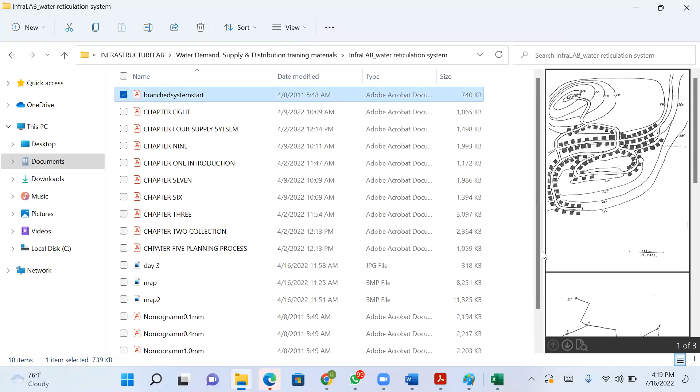Then we have what I call nomograms. These are charts for pipe sizing. I'll teach you how to do that. After you've gotten your discharge, the water demand, you need the size of pipe that will successfully conduct that volume of water. These are the 3 charts you use. There are 3 because they have different roughness. One is for concrete, one is for ductile iron, one is for PVC pipes. So depending on the material you're using for your water reticulation, you use the appropriate type of chart for that.

Then here, I'm going to make a presentation, and this is where we're going to start. In the course of the presentation, I'll show you the drinking water quality requirements based on German standard, European standard, and WHO standard. So these materials are all here for you, and videos will follow shortly. Now, I'm going to give a presentation to start with, and that is this slide, presentation and overview of centralized water supply system. If you don't mind, I would like you to open it.

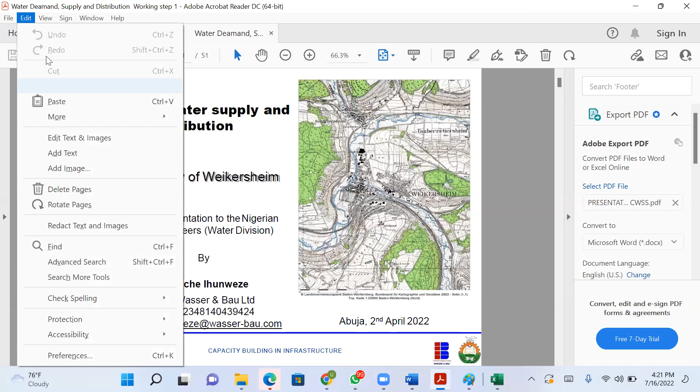I love to start with this slide because this is a presentation I made many years ago when I came back from Germany, and I was asked to make a presentation to the Nigerian Society of Engineers (Water Division). So I made that presentation, and each time I'm doing training, I like to fall back on that presentation. The reason being that the presentation summarized everything you need to know in one PowerPoint in order to design a centralized water supply system.

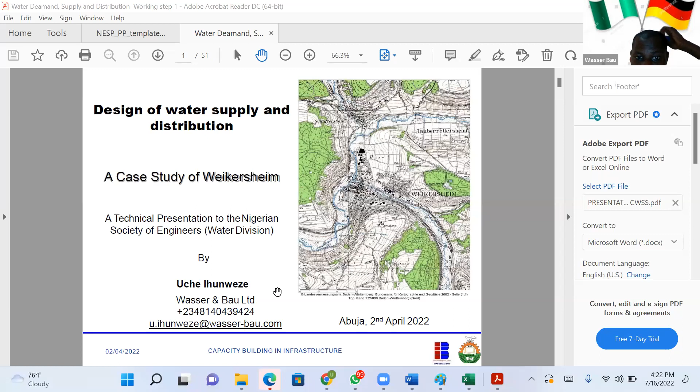Okay, today is the starting day. Some people will call in and... okay, I'm sorry about that. I think one or two of us are having issues logging in. So can we open this slide? Design of water supply for a case study. Okay. Just hold on, gentlemen. Some of us are having issues joining this meeting and... okay, meeting info. Copy the link. Just hold on, please. Can somebody see if I'm sharing the slide? I've already shared the slide. The slide is already on Google.

Okay, so let me start with a summary of how you go about water reticulation, either from the angle of a consultant or from the angle of a contractor. So this is what you need. We'll start from the angle of a consultant, because you are the infrastructure expert and you've been consulted and requested to design a water reticulation system.

So the first thing is there are 6 components, or 5 technically. You do the introduction, you do the description of calculation basis, you do the presentation of estimated figures, you design your distribution network, you analyze the distribution network, and then you conclude on your design.

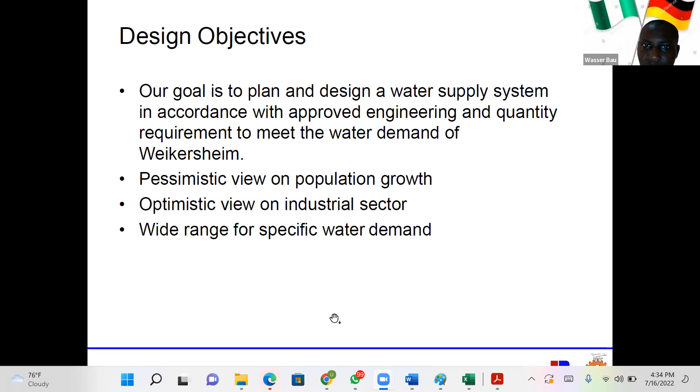So what next do you do? You now study the area. You describe the area. How is the area? What are the contributing streams in the area? How is the geotechnique of the area? How is the groundwater flow, if you have access to this information?

And are there danger spots? Are there landfills? Are there mining areas that you should avoid? You just give a total description of the place you are designing for.

The next thing is you give a sectoral study, okay? Like if I'm designing for a place like Abuja, I'll say that Wuse area is a commercial area, Central area is a commercial area, okay? I'll say that Lugbe is a residential area. I'll say that Pape is a mining area. I'll just give a total description so that your client or whoever is reading your report will be on the same page with you in terms of understanding the dynamics or the unique characteristics of the area you are designing.

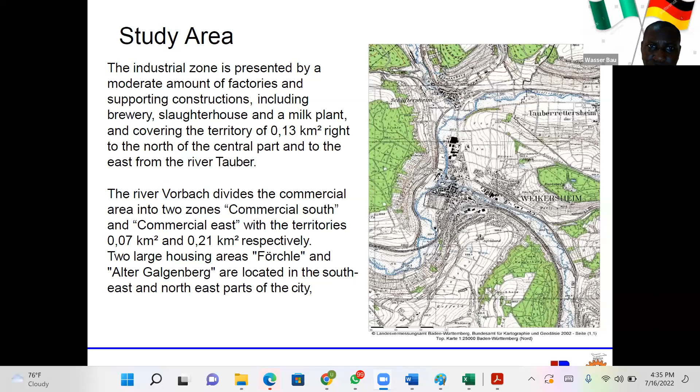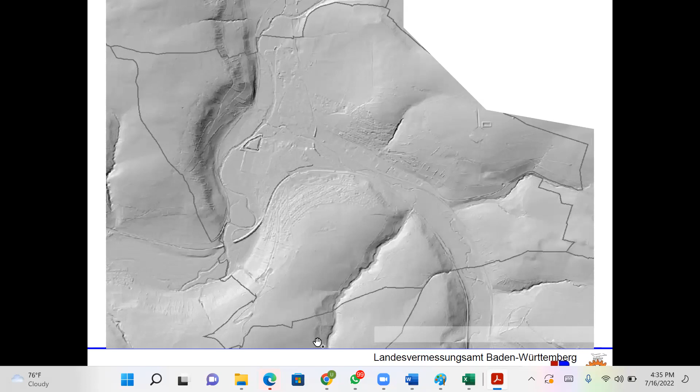After that, you include some pictures of the place, get some maps from Google Maps, a GIS person, surveyor, architect's plan, just get some information that will enable you to have a background and know how to do your distribution and your network. Okay, you can also show how the area is undulating, in terms of how the landscape is. It also helps make people understand how the area is.

The next thing you need to do is you might have to take sections. You have to cut sections and show why you need to provide 2 water systems. Now, looking at this picture, you could see that it is not easy to have just 1 water system for this area. It's almost impossible, because I'm wondering how you can lay your pipe along this valley. So if this is given to you to design, you'd definitely tell your client that you're going to do decentralized water supply systems. That means it will be phase 1, phase 2, or section 1, section 2, right?

Yeah, somebody brought a design to me some time ago for a medical school in Ogun State, and they were planning to design a centralized water supply system for a 200-hectare land. And this land is almost flat, so there's not much head where you can locate your overhead tank. When I did the estimation, I found out that if you are to deliver water by gravity, the pressure from point A to the last point will almost be 0. So I told them that a centralized water supply system is not feasible, and that they need to do a decentralized system.

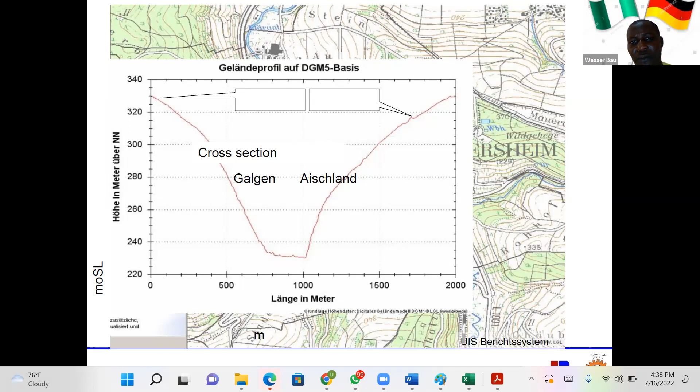So if you look at the whole system, it is one water source, but a decentralized system. Because a centralized system will mean the water will come from Lower Usuma Dam and then distribute to all these places, but it will not work. Because in some areas, you need to provide booster stations. In some areas, the pressure is going to sub-zero. Therefore, you need a pump to pump it further, right?

So you take sections. The next thing you do, just like what I just explained, is what we call zoning, pressure zoning. You can call it zoning or pressure zones. Why do we need pressure zones? I will tell you why.

The standard in water design says that the pressure in your system must not be more than 8 bars. If you look at it in terms of elevation, what is 8 bars? 8 bars simply means an 80-meter height is equivalent to 8 bars.

So if I'm doing a design where the difference between the water source and the consumer is more than 8 bars, it means you need to break it into zones. When I say breaking into zones, it means you need to define phase 1, phase 2, and phase 3. You need to break them into zones.

So for this design we did, the difference between the highest point and the lowest point is more than 80 meters. That means what we need to do is break them into zones.

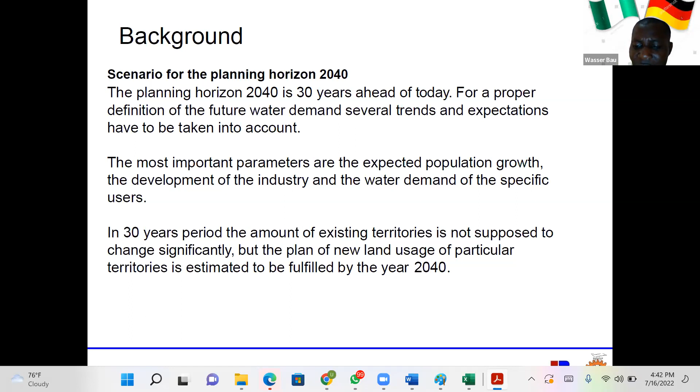You ask yourself, how long do I want the design to last? 30 years, 40 years, 50 years. When you determine that, you now do your expected growth, your expected development to meet the demand of 30 years. This entails projecting your population—what will the population be in 30 years' time? Let's assume the population for the city is 10,000 people.

Now you ask yourself, in the next 30 years, based on a certain population growth percentage—Nigeria is growing at 4%—what would the population be in 30 years' time? That is the value you now use for your design. I hope we get that very well. Then every other parameter we use must be tied to that 30 years.

So let's assume they are going to build a university here in 30 years' time. It means you will do your design with the anticipation that there's already a university in that area.

The next thing you do is sample your water source. There are about 4 to 5 water sources. We have groundwater—your source of water can be groundwater. It can be spring water. It can be surface water. It can be water from a long-distance water supply—in other words, from another treating body, like Lower Usuma Dam, where the water has been treated and is now coming to Kuje or going wherever.

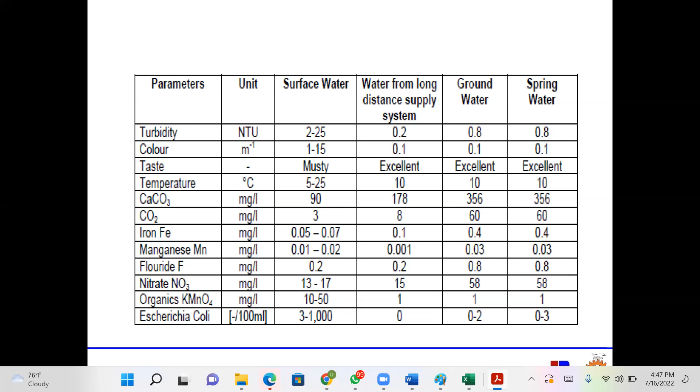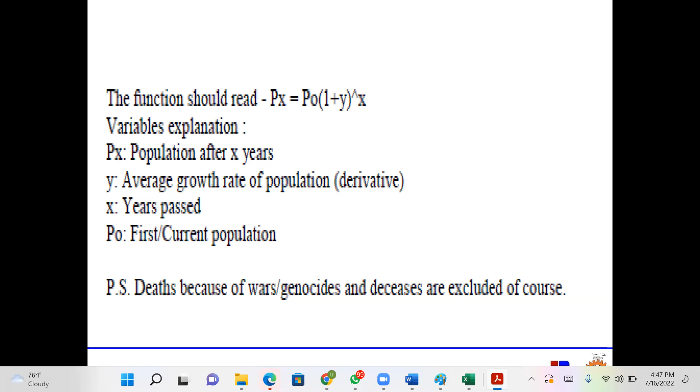So let me recap what we've said again. We did the background, we sourced the water quality and identified them. We did the population projection and sectoral representation of the population into clusters. We did the water test analysis. Then we now do the network distribution—if you look at the slide, that is the progression.

When you see diagrams like this, you discover that what have been designed here are the mains for every pipe distribution network. We have the main pipes, the secondary pipes, and the tertiary pipes. The main pipes are the major pipes, the ones that go on the streets. You can also call it the main pipe or the primary pipe—those are the big pipes.

In Abuja, the main pipe for the Abuja water scheme is about 1,500 millimeters. From 1,500 millimeters, some areas moved to 1,200. It started from Lower Usuma Dam with 1,500, that is 1.5 meters diameter. As it gets to somewhere in Maitama, Mogadishu Barracks, it came down to 1.2. Then from 1.2, it came down to around 600, from 600 to 300, and from 300 to 100. Why are they going down? Because as the water is moving, the demand becomes more, depending on where you're coming from.

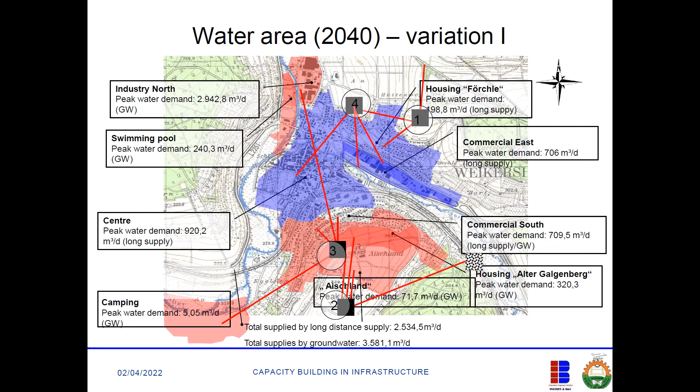After detailing the subgroups or sub-areas based on their unique composition, you now list their elevation, their population groups, and their number of inhabitants.

Then you do two scenarios: the current scenario, and in 30 years' time, the future scenario. In 30 years' time, this one will have reduced by 8%, while this one will have increased by 6%. Housing area will have increased by 6%, and the camping sites will have increased by 2%.

So you do this, and then you get the final figure. If you look at this figure, you see that the numbers here are bigger and more. That is the figure you use to do your pipe sizing.

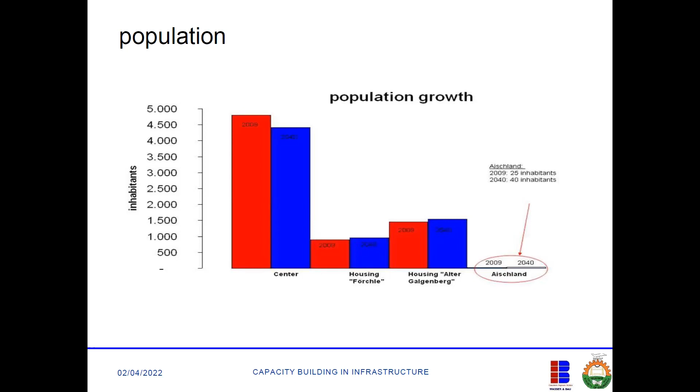All these are not that very important. They are just part of what a consultant will do. You plot a graph to impress your client, showing them the current demand for this area and what the future demand will be. You can see that some areas are going up, some are coming down.

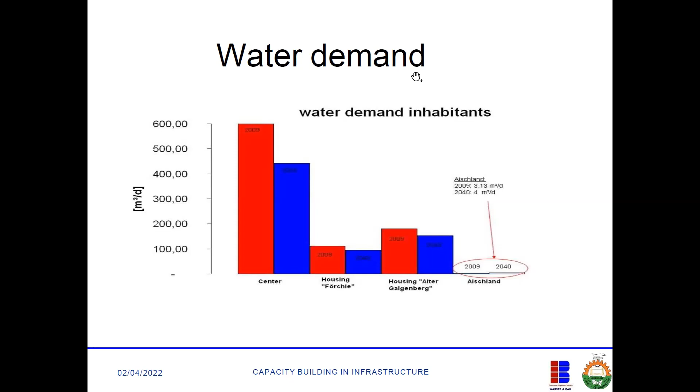Right, okay, so a recap again. What are the basic steps in water demand, water supply, and design distribution?

The first thing we said is that you need a map. It could be a layout, it could be a topo map, but it is important that it is a topo map. I didn't just say map, I said map and topography. Why topography? Because in the area you want to do your water design, you should be able to know the highest area and lowest area. The water source will most likely be found in the lowest area, while your elevated tank will most likely be located at the highest point.

Why do you need the highest point? Because it is distribution by gravity, so that it does not involve huge energy costs. 95% of every water reticulation system is always by gravity. All you need to do is pump water from your source into the elevated tank, and from the elevated tank it comes to the final consumer.

Then the second thing you do is describe the area. Talk about the features of the area, vis-a-vis how you want to source water. Is it groundwater? Is it surface water? Is it aquifer, and so on and so forth. You also describe the area to show areas where it is not good to site the waterborne system, or areas that you suspect might lead to failure.

Then what you do next is describe your population basis. What is the basis of your calculation? What are the water demand users? Schools is different from house is different from industry. Then you ask yourself the second question: are there growth? Is this area going to grow in the future? If it's going to grow, you must factor in the growth in your design.

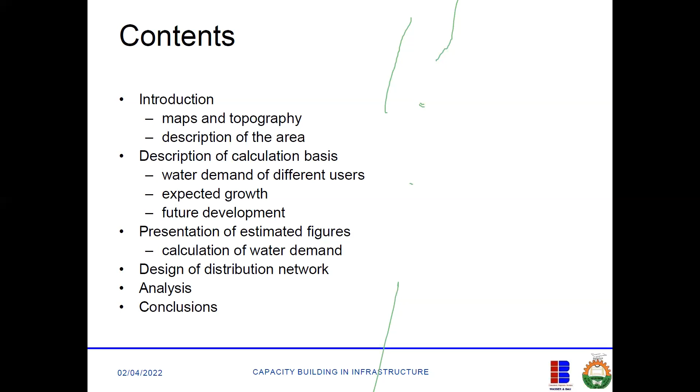So that's what we did so far. Any question? The following slide is just to explain these basic points. Any question? Should I take no question as we understood everything, or should I assume that you didn't understand anything?

For me now, there's no questions. It's just a refresher. Sorry for coming late. My name is Musa Titi.

Thank you, sir. Okay, Bukola, your hand is raised. Can you ask your question? Yes, thank you, and good evening everyone. I have about 4 questions.

Okay, go on. Number 1, I want to suggest that you use a local map, because sometimes when you need to extract information from Google Maps in Nigeria, we might not be able to get it. When you use a local map, when we have the challenge, we'll be able to know absolutely what option. Yeah, absolutely. Can I go on? Yeah, just hold on.

Also, in water reticulation design, the first person that goes to site is your surveyor. You must send your surveyor to site to go and capture the real data. It is only when you are designing a place like, let's say, Sambisa Forest, where you know Boko Haram is there, then you can use Google Map, right? But if you're using Google Map, you must know that there's error.

So at the end of the day, just anticipate changes in terms of elevation, unless you're going to go to NASA and get the real NASA data, Landsat data. But if it is the online Google Map, there will be about a 1 meter difference in terms of your elevation. That's a very good one. Please continue your question.

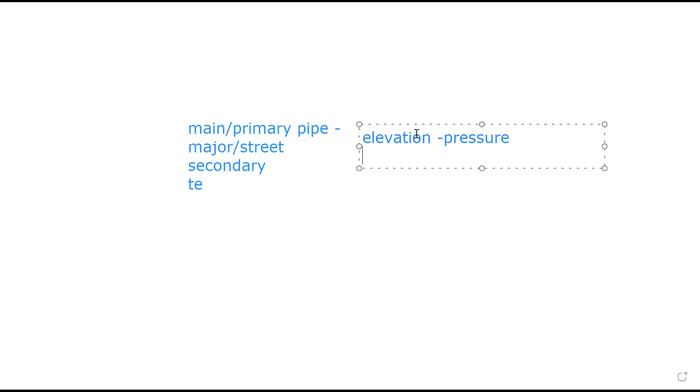That's a wonderful question. I think what you just did was to move ahead of us. We'll still get there. We're going to do a lot of design. But let me quickly say it here for the benefit of everybody. The first question is about the relationship between elevation and pressure. As a rule of thumb, my engineer, in our school, those days we did hydraulics: 10-meter height of water is equivalent to 1 bar. If you Google it online, it's just what it is.

Now, the idea of 8 bars is that we don't want our pipe to burst on the network. Even if some pipes these days can carry 12 or 16 bars, how about the other appurtenances, the other assets? How about the taps of the consumers? So that's why the code I'm using, which is a German code we are trying to domesticate to Nigeria through NSC, says the maximum pressure we anticipate in our system is 8 bars. So you must not exceed 8 bars.

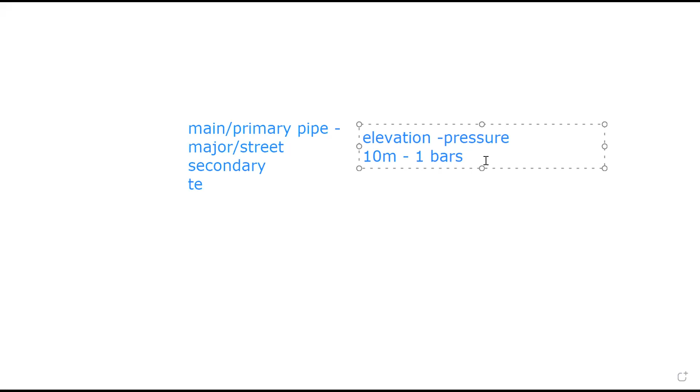If you exceed 8 bars, when you open your tap, the pressure of water will be so much that the water will be splashing everywhere. So that is that. Then, coming to the horizontal, that is where pipe losses come in, and that's why when you are doing your pipe sizing, you should know whether you're using a PVC pipe, which has a roughness coefficient of 0.4.1 millimeter. What this means is that for every 1 millimeter, you're losing about 0.1. So this is like approximately 10%, let's say. I'll explain this to you later.

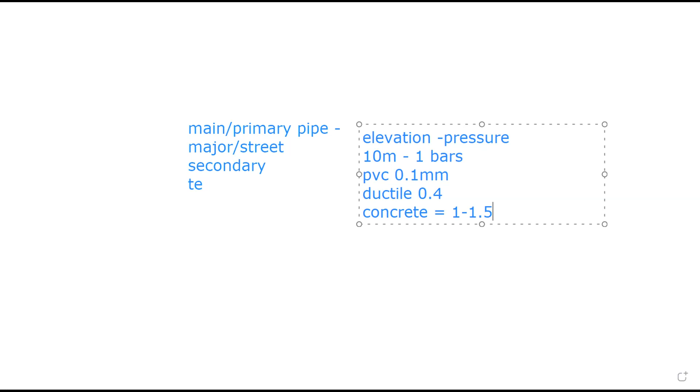Then ductile iron has a roughness coefficient of 0.4. And concrete pipes or asbestos pipe, which has been phased out anyway due to their carcinogenic effect, will give you about 1 to 1.5. So when you are calculating the horizontal losses, it is a function of the roughness of the pipe in addition to the discharge volume, but that one is not too pronounced. And in fact, generally, losses which have to be overcome by the pump are in three things.

Those of us who remember our thermodynamics: losses due to height, which is called MGH, plus losses due to velocity. You remember that thing we say, V squared over 2G.

Right? Plus the losses due to friction, which is delta H, but I don't know how to type the delta H in this laptop now. So let me just put it as H. These are the three losses you anticipate in a pipe network. MGH is the one due to height, potential.

Call this one potential. If I'm buying a pump in the market and I want to pump the water at a height of 20 meters, if I go to my pump manufacturer, I will tell him that the head difference between the source and the point of delivery is 20 meters head. So that already will give me an idea that I'm looking for something in the range of 2 bars. But that does not apply to submersible pumps. That applies to surface pumps, right?

Then, if I'm going to move to a distance of, let's say, another 50 meters, then I will now calculate again the resistance of the pipe for that 50 meters. That is the one we call H. That's the frictional losses in the pipe. Then this V squared over 2G is now the losses due to the velocity change. What do you call it again in fluid mechanics? Momentum change in the fluid, that's the word. They call it momentum change in the fluid.

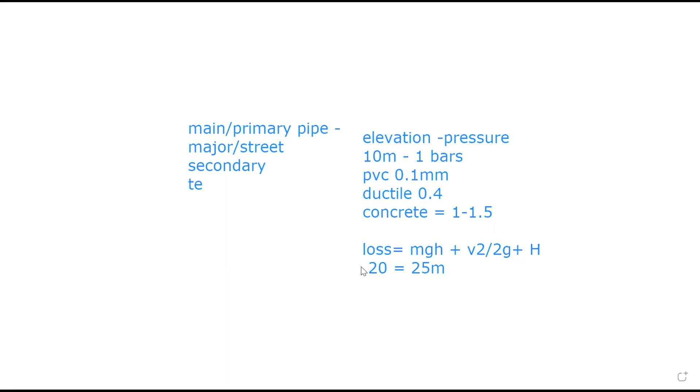Today is the introductory class. So what I'm going to do next is just to run through the study materials and background in civil engineering. As long as your background is engineering, you are capable to do this. You can do it. All you need to do is to get trained. Now, I'm going to run through chapter 1 to chapter 8 so that day one, we have been able to establish a baseline, right? So if somebody left school 10, 20 or 30 years ago, let me refresh their mind about everything they need to know about water. So if you have downloaded the materials, I would like you to go to chapter 1.

There are 8 chapters. I'm going to go through them in the next 1 hour. I'm going to run at a speed, because I expect you, between now and next Saturday, to find time and study them, right? So that when we come next Saturday, we'll do a case study. Then the thoughts we start today will just be application. So let me go to chapter 1 now. Any question while I look for my chapter 1?

So chapter 1, what is the course objective? I've explained all these things. It's for us to understand the fundamental structure of a centralized water supply system, understanding of the hydraulic systems, understanding of the functions and structures of single elements of the centralized water supply systems. And finally, for us to have the ability to plan, design, and calculate a centralized water supply system and its single elements.

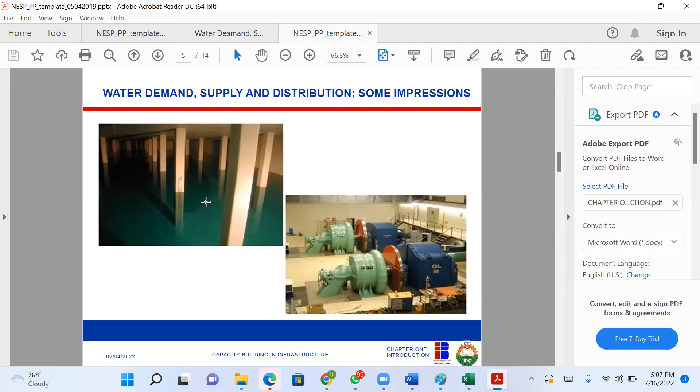If you see dirty water and it's smelly, what it simply means is that that water does not have adequate oxygen. So if you want to treat that water, what you need to do is to put oxygen inside it. So whether it's a wastewater treatment plant or water treatment plant, oxygen plays a huge role in treating the water. And we all know that oxygen constitutes about 21% of the air. So if you pass air through the water, it will absorb the oxygen inside the air and release the other gases for you.

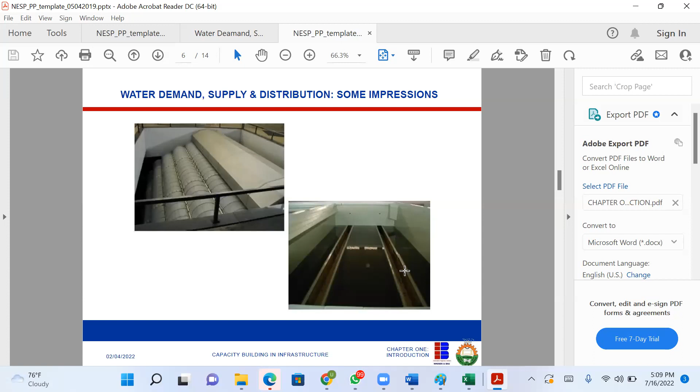What do you need water for in a whole day? The average human being needs about 3 to 10 liters of drinking water. For preparing food, washing dishes, each person needs about 15 to 25 liters. Flushing toilets, you have it. Irrigation, you have it. So at the end of the day, when you have done your calculation, we expect you to get between 100 and 150 liters per day.

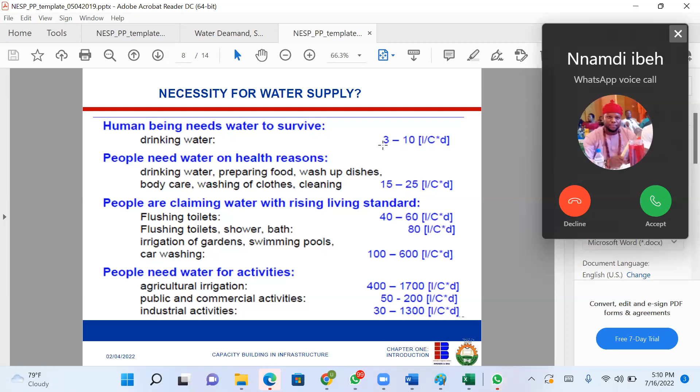So most times we'll come and tell people the drinking water standard is 150 liters or 120 liters or 100 liters per day. The question now is, how did you arrive at that? This is how we arrived at it, by analyzing the water requirements. Okay.

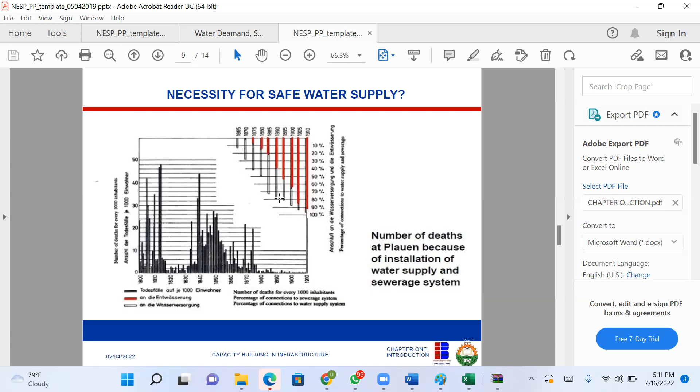So this diagram is showing you the relationship between water availability and number of deaths in Germany. So all these other ones, I will not go through them. If you go through them, you'll understand them, right? For instance, impurities found in water can be microorganisms, chemical substances, acidic material. All these ones, you can really understand them.

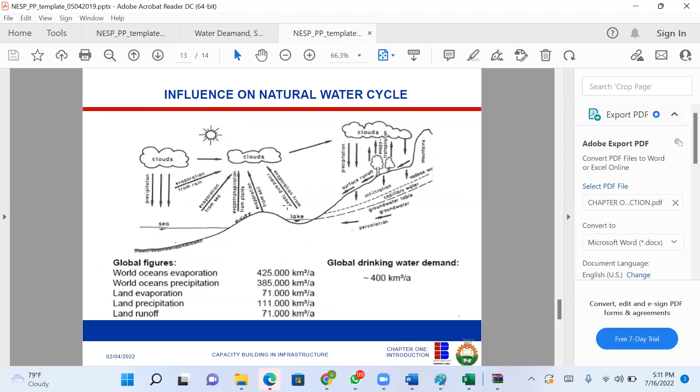So that's all. Any questions? Chapter 1 is gone.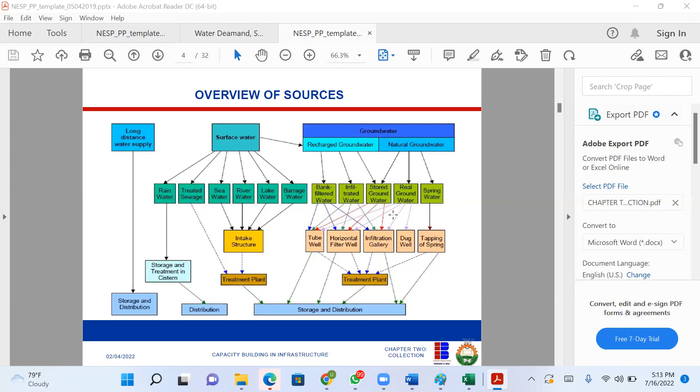Then if you are looking at recharged groundwater, you first of all ask yourself, is it recharged groundwater or natural groundwater? Irrespective of what it is, there's also a need for you to build a collection system. And from the collection system, you know the end solution. Okay, like this one says, stored groundwater. Stored groundwater needs an infiltration gallery to pull it out. And after the infiltration gallery, it goes to treatment. Okay.

So if you want to select a water source, these are the considerations. The first consideration for selecting a water source is the quality of the water. You can't compromise on the quality. Then the next one is the design quantity. How long will it last before it dries up? Is there enough yield? And the third one is the economics of extraction. How do I extract it? Right? It's one thing for you to dig a borehole at 300 meters, and when they ask you to buy a pump of 3 bars, it becomes a problem for you.

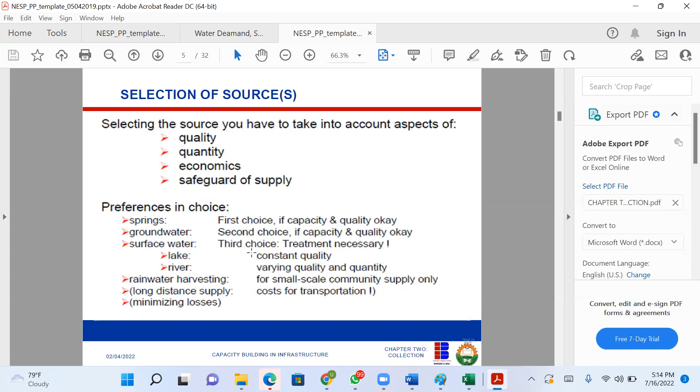Right? So if it's groundwater, you ask yourself whether it's groundwater with multiple formations, groundwater with a free water level, or an artesian well. An artesian well is just like the other one that ran away.

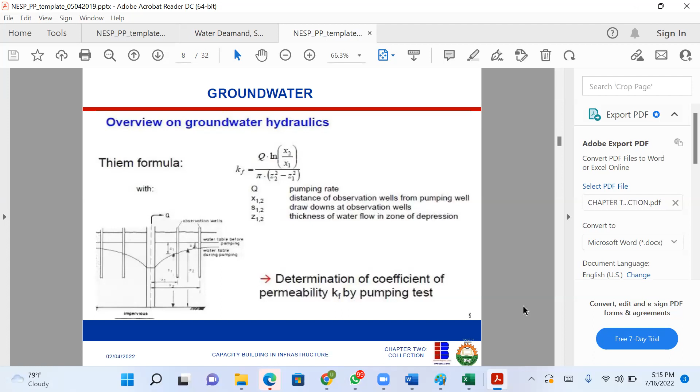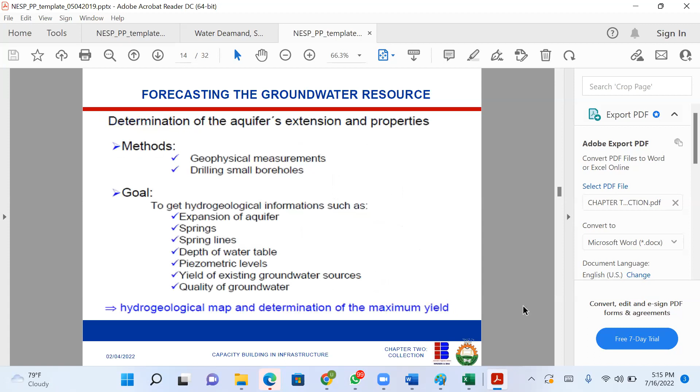So I think we can read all this and understand. Everything beyond this place is something you can really understand. It's not complicated at all. Right? So if you still have any question, raise your hand or let me know. So I'm going to chapter 3 now.

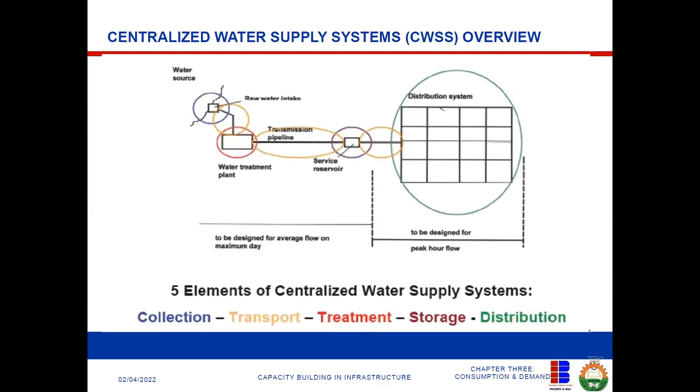Water consumption, right? In a provided area, it's the actually delivered and measured water. Water demand is the estimation of the water required to be delivered. So the consumption is what they have delivered and measured, while water demand is the estimation of water quantities to be supplied, to be delivered in an area of supply. And then water demand calculation is the forecast of the water consumption in an exactly defined area of supply.

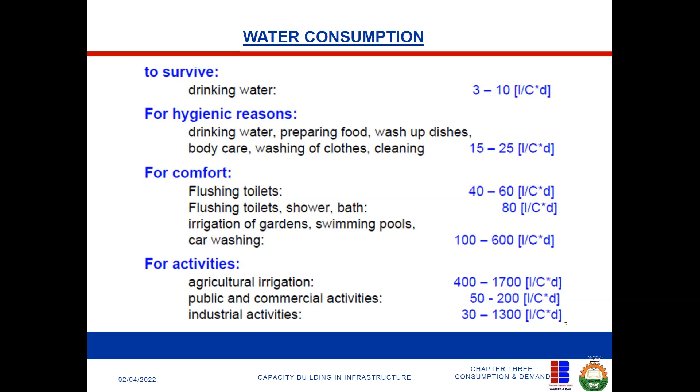So you can see if it's a consumer, different users, you need to factor in their water demand. Somebody mentioned industries. I think the best thing you have to size for industry is to ask yourself what the industry is producing. What is their production capacity? From there, you can estimate the amount of water they need in a month.

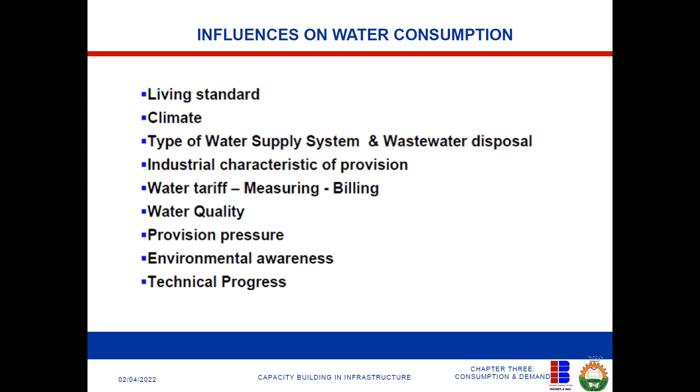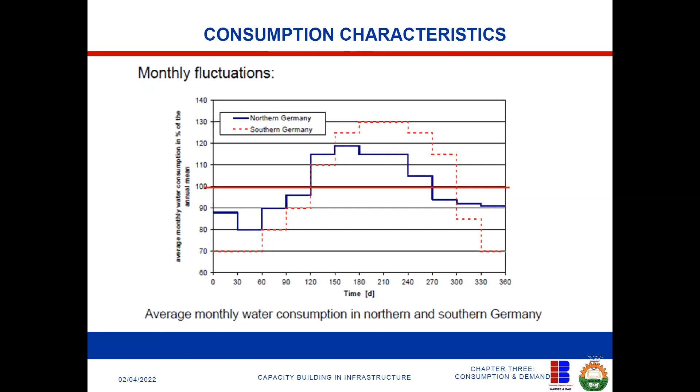Okay. So here, I just want us to get familiar with some of these terms. QDM is the average specific demand, the yearly one. Q maximum is the specific daily demand. So here, this is the demand Q in liters per capita per day. This F is known as the maximum peak factor, right? For daily peak factor and maximum hourly peak factor.

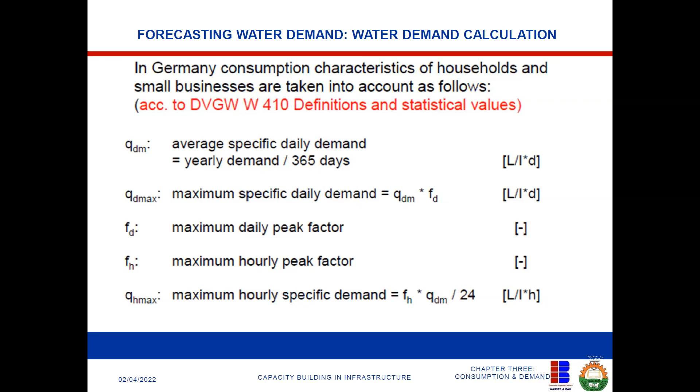What we're trying to learn here is that for every design you're going to do, you're going to put in a safety factor. So even after you have gotten your discharge, you still have to multiply it by a safety factor to take care of all other unforeseen circumstances or outcomes. So these are examples of the peak factor. We'll still come to all these ones, right? Depending on what you're designing.

Here are the water consumption of different subgroups. In a hospital, for instance, they expect them to consume between 120 liters and 830 liters, right? In schools, they expect to consume only 0.006 meter cube. If you convert this into liters, that will give you about 6 liters. So if you're designing for a school, you shouldn't go and allocate them 100 liters, 120 liters per capita. No, it is just school. So school is about 6.

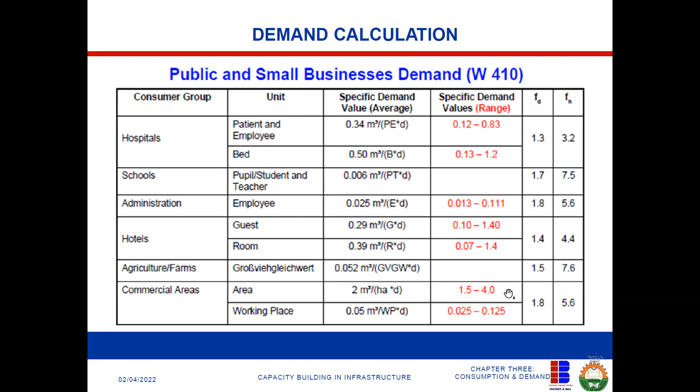Why? Because what you do in school is maybe go to the toilet and then wash your hands. You don't cook, you don't bathe, you don't wash. So school will have a very low consumption. Then the next one is administration. The next one is hotel, agri farms. So these are all for you, and these are the standards. So you can reference them anytime. This 1.5 is 1.5 liters, and so on and so forth.

Then for dams and storage facilities, you expect them to last for 30 to 40 years. So this is the population formula you use to estimate the growth. Remember what we said, you're not designing for today, you're designing for the future. So the parameters you use are the parameters of the future, right?

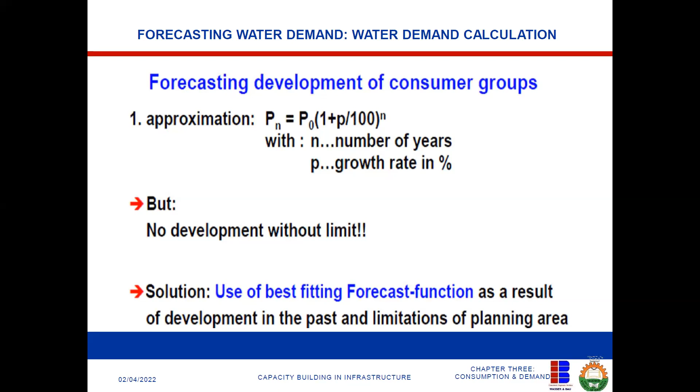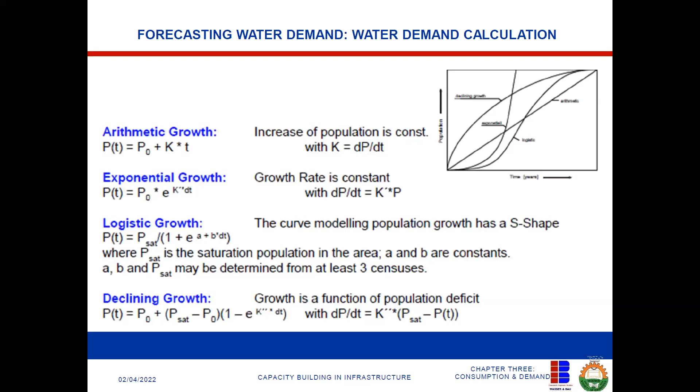There are different growth formulas: the arithmetic growth, the exponential growth, and declining growth. So you choose the one that represents the subgroup you are designing for. I know that most people use arithmetic. So you can see it here, a different population growth. So nothing much here. That's the end.

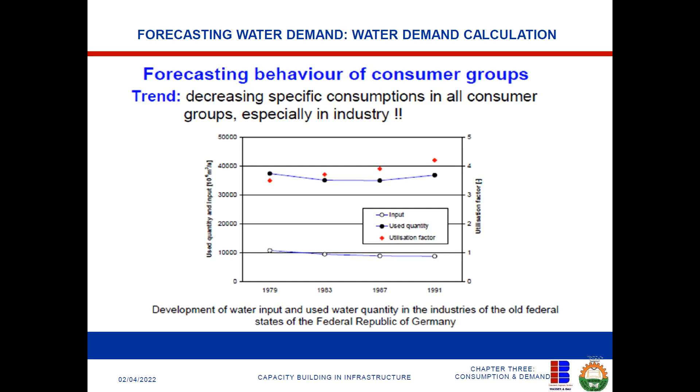Who is responsible for water supply? Then what's the economic situation? So that at the end of the day, can they pay? After investing money, can they pay? Then what is the local situation? What do you have? Are they using flush toilets? Are they using pit latrines? Are they farmers? Do they have gardens? What are their water use characteristics?

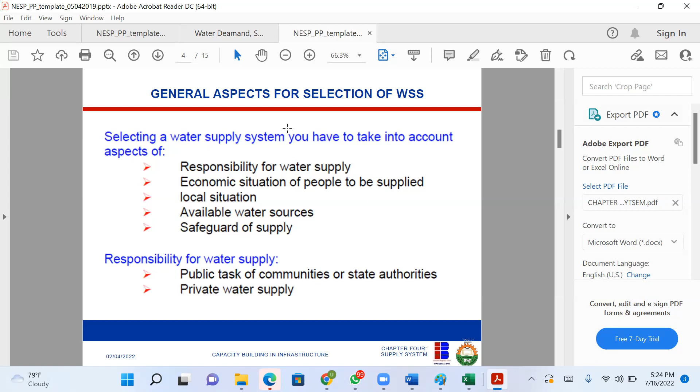And the next thing is, do they have an available water source? Do they have a spring? Do they have river water, surface water? Do they have groundwater? Then how safe is the supply? You don't sink a borehole in your neighbor's compound, right? If you quarrel tomorrow, he will seal off the borehole. So all those kinds of things, you need to consider.

The gravity system is the system whereby water comes from the source through the intake. It goes to a treatment plant. From the treatment plant, the water goes to a pumping station. From the pumping station, the water goes to a storage reservoir. And from the storage reservoir, the water goes to the consumers. That system is called the gravity system. And I can tell you, 95% of water supply systems all over the world are using the gravity system.

But there is another system we call pressure systems, whereby you're going to have your pump running steadily. So in that case, there's no need for a pumping station. Rather, you just have inline pumps. So the pump will provide that pressure head difference. So what I've discovered is that in places where you have such a thing, the system will be airtight. So once you open your tap, it will trigger the pump to come on, and then supply you with water.

I did an audit for a hotel in Abuja, and I discovered that they don't have an elevated tank. And I told the management that they should provide an elevated tank. If not, each time a client opens a tap in his room, the pump will come on. So we discovered that the pump is almost running 24 hours. And that is consuming a lot of power. And we recommended that they should get an elevated tank. Because the advantage of an elevated tank is that you save energy. By saving energy, you save cost.

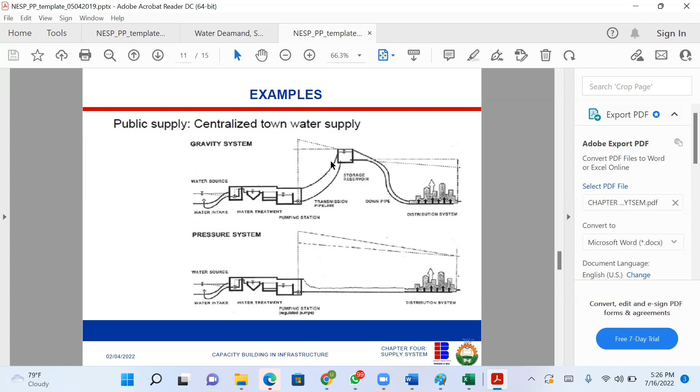This is another example of a company that supplies water in the south part of Germany called Baden-Württemberg. The water source is from what they call Bodensee, which is the Lake Constance. Lake Constance is located near the Alps, these long mountains in Europe. In between there, they have this lake that is a bit safeguarded, and that is their water source.

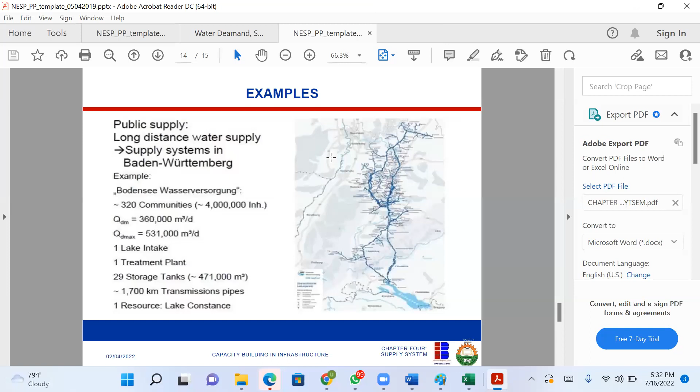But when it gets to the final destination, they start the treatment. Because if you treat from source, it might get contaminated by the time it gets to the point of usage. Also, even if you use a closed pipe, losses might be much.

So if there are meant to be losses, let the losses be when the water is not yet treated, because there's a certain amount of money you spend treating one cubic meter of water. So treated water is not meant to be wasted. Untreated water, you can afford to waste. But treated water already has an economic value, and if you waste it, you suffer losses.

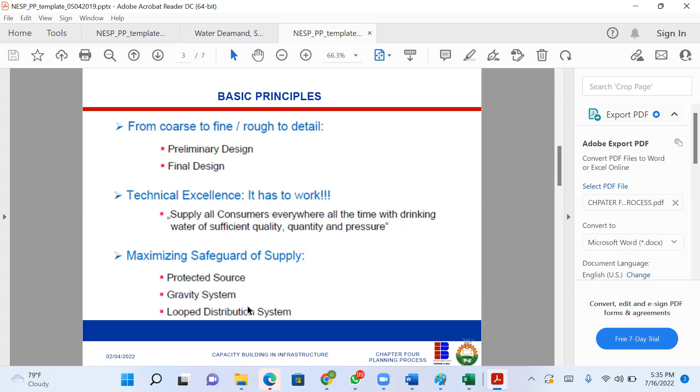And there are 2 types of systems: gravity systems or pressure systems. So to protect the water, you're advised to use a gravity system, and then maybe you can use a loop distribution system. I'll explain all these things very soon.

So part of how you do it for water is you must protect your water source. To minimize health risk, you also might have to disinfect the water using ozone or chlorine, which has been banned anyway, nobody's using chlorine again because it's suspected to be carcinogenic. Sorry, it was asbestos that is carcinogenic. Then your water must be far away from sewers, and it must be tight.

So let's continue. How do you minimize costs? You minimize length of pipe, minimize number of pressure zones, because the more pressure zones you have, the more water tanks you provide. Then minimize treatment, that's why I said groundwater is the best. Then minimize pumping, you have to make use of gravity or the topography of the area, except where impossible.

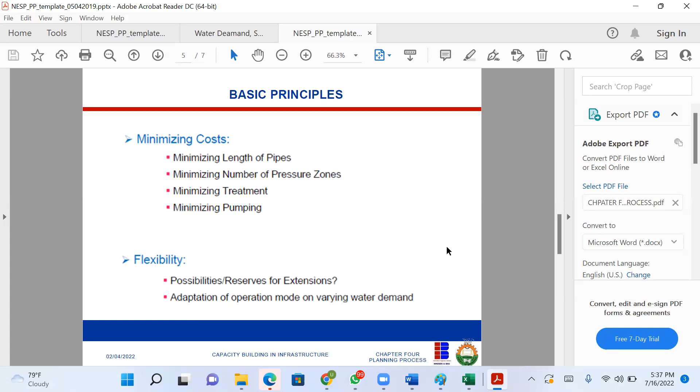So we've talked about the planning steps and everything, right? The planning steps include calculation of water demand. To do that, you go into zoning the boundaries, and you talk about the household, the industry, the agriculture, and everything that you calculate. Do you understand this?

Then you choose your choice of system. What kind of system do I want to use? Is it a pump system? Is it a gravity system? And so on and so forth.

Then next, you determine the location of your elevated tank and pumping station. The elevated tank is usually at the highest point. Don't put the elevated tank at the lowest point, you are shooting yourself in the foot. You have to put your tank at the highest point in the area so that it will give it extra head.

Then there are two distribution systems: there's a branch system and there's a loop system. The branch system is that system where everything branches off, while a loop system is one where two places are looped together so that if water is not flowing in one direction, it will flow the other direction. I will explain this thing more in the course of this training.

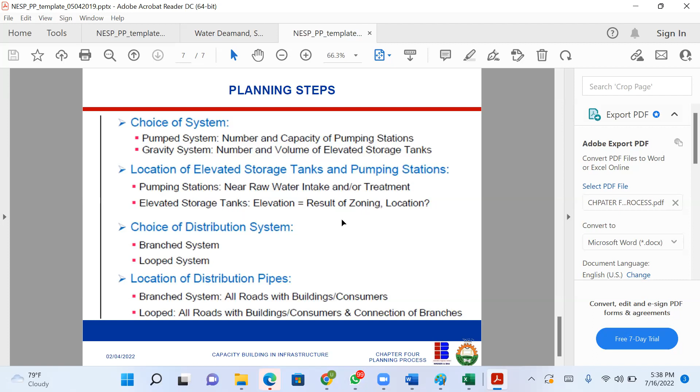So we're done with chapter 4.

Chapter 6 is like a foundation. So we've discussed this before, we'll discuss it again, right?

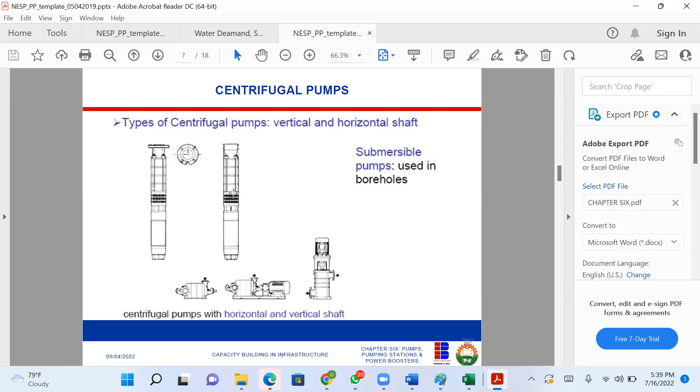Okay, so here it's talking about pumps, centrifugal pumps and everything. I think this one is talking about the horizontal type. Okay, this is a submersible pump used in a borehole. And they have horizontal and vertical shafts.

Okay, so why do you need a pumping station? For it to be a pumping station, it must have 2 or more pumps. Not when you have one pump do you say it's a pumping station. No, it must have 2, one on, one off, in case of maintenance.

Okay, the pumping station must have a flow guard. It must have a reflux stopper.

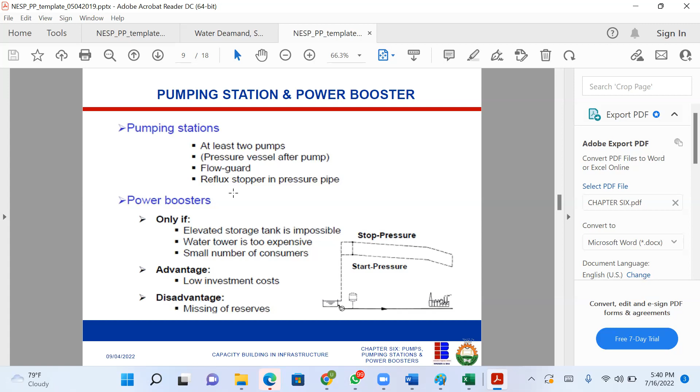So booster station, this is how it looks like. You can just really understand. So this is what I'm trying to explain to you, the hydraulics for pumping, right?

H, the losses in a hydraulic network comes from 3 places: the geodetic height loss, the height loss due to velocity, and the height loss due to the frictional factor of the pipe. So sometimes we eliminate the one due to velocity and just limit it to the geodetic one and the other one.

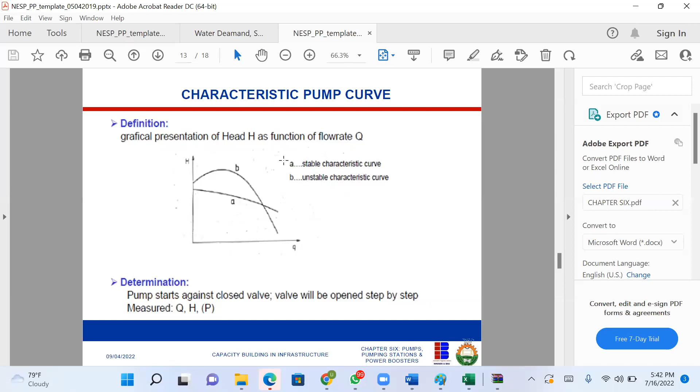So this is head, as I said. Then here, what we call a pump curve. A pump curve, if I remember, is like a chart or a table that shows the behavior of a pump over a period of time. Because this is what a pump does: if you want a bigger discharge, your head will reduce. If you increase your head, the discharge will reduce.

That's why if you go to buy a pump, the pump manufacturer or the pump seller will give you a range of head that the pump can operate and a range of discharge that the pump can deliver. So you now calibrate it, so that point where the operating point is, is that point where the head and the flow have been maximized.

Okay, that becomes your pump curve, that becomes the operating point of the curve. Remember thermodynamics.

So sometimes you design a water reticulation system, and there's a need for you to introduce two pumps. There's a need for you to have more head or more discharge. Now listen to this: if you want to increase the head you are getting from your pump, what you do is put those pumps in series.

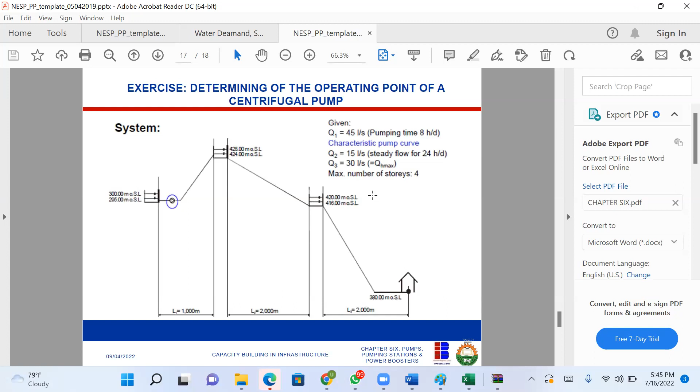So this is just what I explained to us about pressure zoning, right? About pressure zoning. Sorry, before we move away from here, about 4 slides away, the one that talks about the manometric head or something like that, in sizing the pump. Is it the same head you were talking about? Yes. If you make it the subject of the formula, yeah, the same head, it's manometric head. Is the head difference just the head?

Like this one, if it's a hydropower station, for instance, when you want to build a hydropower station, there must be head. It is the head that will turn the turbine, that force, that MGH, right? That potential, that's what will turn the turbine. So the bigger the head, the faster it will turn the turbine, and the higher the current generated, just as well as the discharge, the water that is coming.

We will still get to where you... Go ahead. Yeah. The one that looks like an N, I don't know what to call it. Efficiency. Is there a chart to pick that? Sorry? Is there a chart to pick that? Yeah, there is. But efficiency is between 0.9 and 0.99, depending on the label, right?

But the original equipment manufacturer will tell you the efficiency. And that efficiency you see there is efficiency of the motor, turbine, generator. When you see efficiency of something being a certain value, it is the summation of the whole efficiency of the individual components of that system. I should go on.

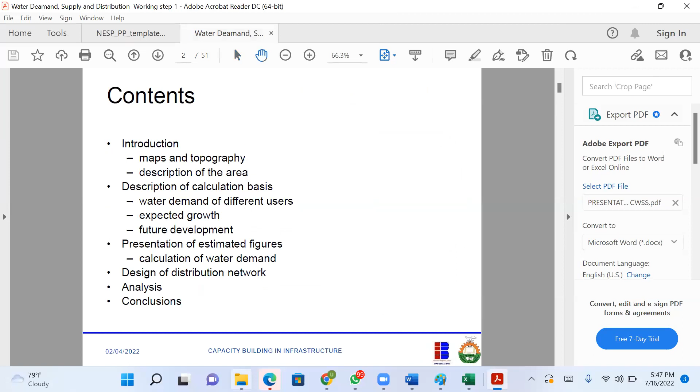Okay, we're done with chapter 6. Yeah. Well, I think we are meeting up. In the next 5 minutes, 10 minutes we should be done. Chapter 7. I think we still have chapter 9. So here, nothing much. Okay, I've explained this before.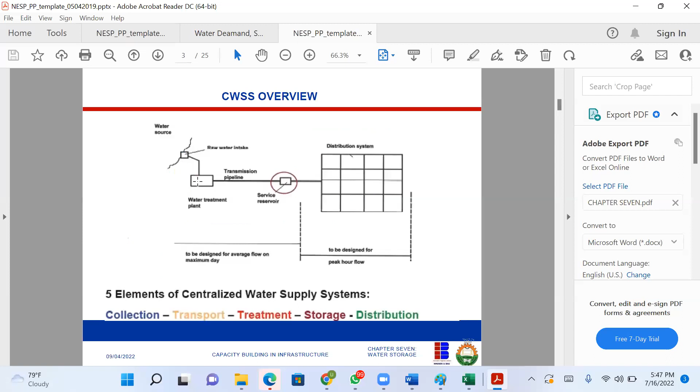Function of elevated storage tank. What the elevated storage tank does is to equalize the difference between the inflow and outflow. Now, what do we mean by this? If you are pumping water into a storage tank, it might take 1 hour or 2 hours to fill. Now, you switch off the pump, people will start using the water. At some point, the pump needs to come back again. And even while you are pumping, some water is being used. So the storage tank equalizes the difference between inflow and actual demand. So the excess stays in the tank.

The second thing is that you provide water and pressure in case of breakdown of the inflow. In case your submersible pump has an issue, if you have pumped enough water in the tank, you can use it while you do your repairs. Then having water in the storage tank provides nearly constant pressure in the network because the water is coming from a particular place. So you have already designed it to say this water is coming from a head of say 60 meters. Therefore, I'll be having something like 6 bars in my network, and so on and so forth.

Then types of storage tanks. Storage tanks also provide water in case of fire. In case of fire, you don't need to go and start pumping from groundwater. You just go to the water tank, take water and quench the fire while the fire service comes. So you have types of tanks: surface water tank, it can be elevated water tank.

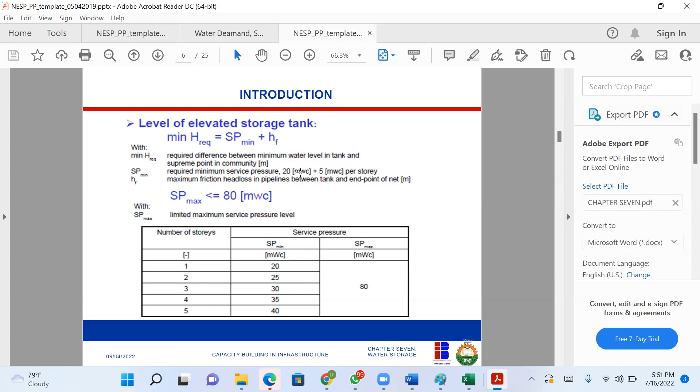So maximum service pressure must be less than or equal to 80 meters of water, or 8 bars, as we said. So level of storage tank. For a storage tank it is the minimum service pressure minus the reservoir head plus the head losses. That is how to get your pressures on board. Let's not worry ourselves about this, right?

Storage volume. We talked about storage tank, now storage volume. Storage volume is made up of 3 parameters. The first one is equalization volume. Just like we said, storage tanks are meant to provide us with equalizing the inputs and the outputs, the intake and the incoming. So now here, if you want to get the total size of tank you need, you have to add the equalizing volume, you add emergency volume, then you add volume for firefighting.

Okay, so you can see water for firefighting can be between 48 and 384, depending on the number of hours you want to fight the fire. When we say firefighting, it does not mean you're going to fight the fire and quench the fire, but just that you can contain the fire until the fire service comes, either for 1 hour or for 2 hours.

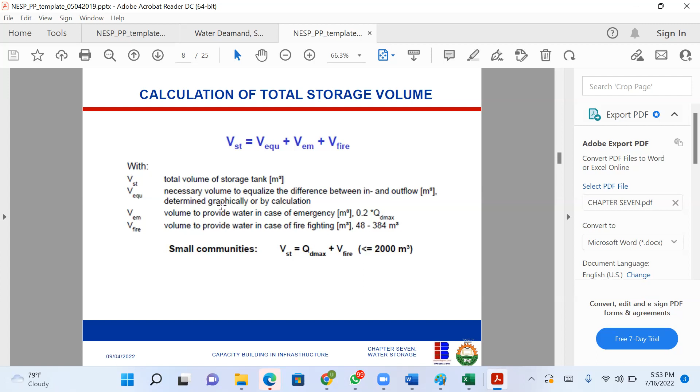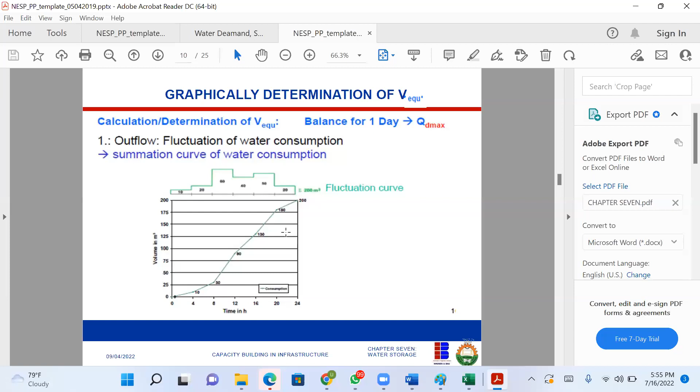So here, what do we see here? Look at that design consumption pattern. Yeah, no. This is that consumption pattern we have. You will now just oppose it with real demand. You will see the difference. That difference is the size of your tank.

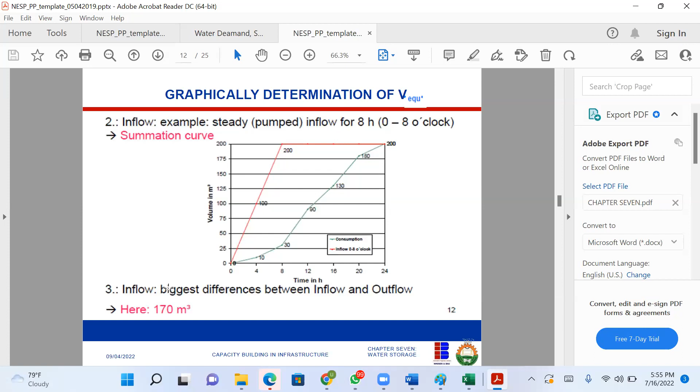So all these are something I think we can really understand. This is an example of a layout; you can read this and understand it. The same thing applies here. Here, you take water, put it on elevated storage tank 1. If you are to supply this water to this person here, he will get the water in excess of 8 bar, because the hydraulic grade line, the energy grade line, is telling you that between here and here is already 8 bars. So what you do is you break it by providing a break tank.

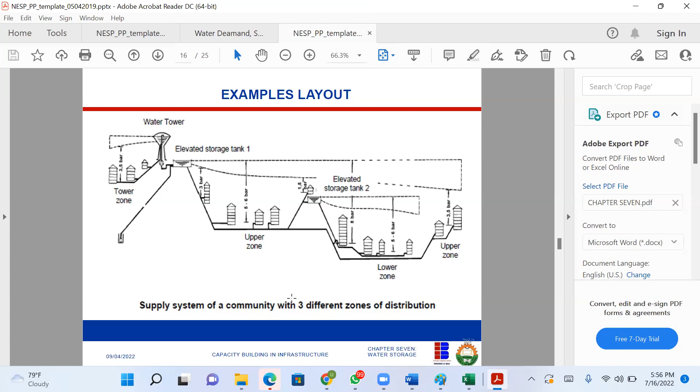So this tank you see here, the water will supply these people at the same 5 to 6 bar. But when it gets here, it cuts it off, and then here becomes like 0. If not, if you start from here to go here, it will be about 11 bars, which is beyond standard. So all this, you just have to have knowledge.

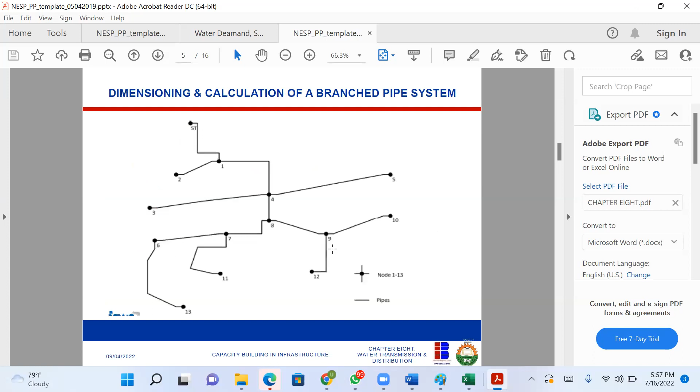So we're done with chapter 7. We are now on chapter 8. That's where we'll end for today. If we didn't do chapter 9, I think I'll just request us to read it up. Okay, chapter 8. We'll not do chapter 8 now, we'll do chapter 8 tomorrow, because chapter 8 is calculation, right? How to calculate a distribution network, after we have done our demand distribution, demand calculation, and everything.

Let me see what is in chapter 9. Okay, same thing. Okay, water source. This is an example of a branch system. You can see everywhere is branching out. While this is an example of a loop system. You can see everywhere is looped together.

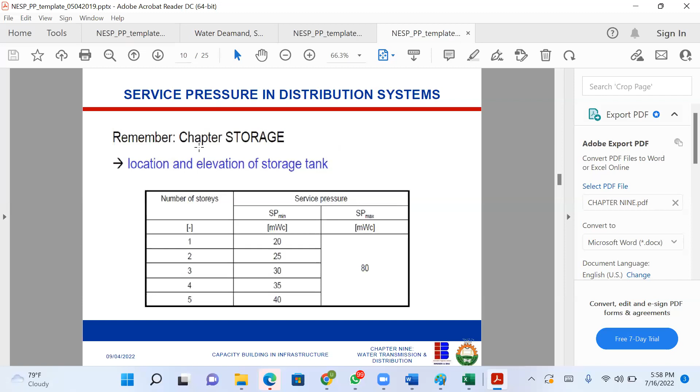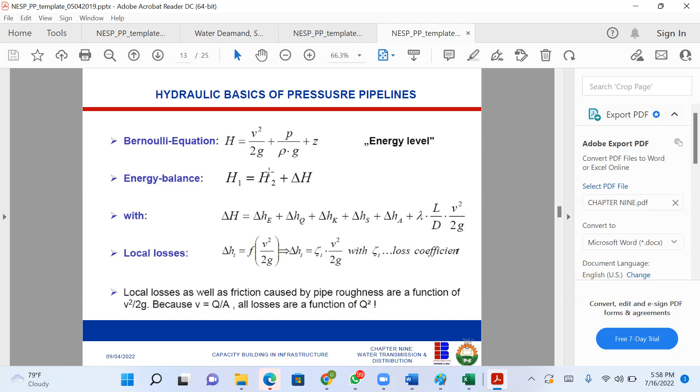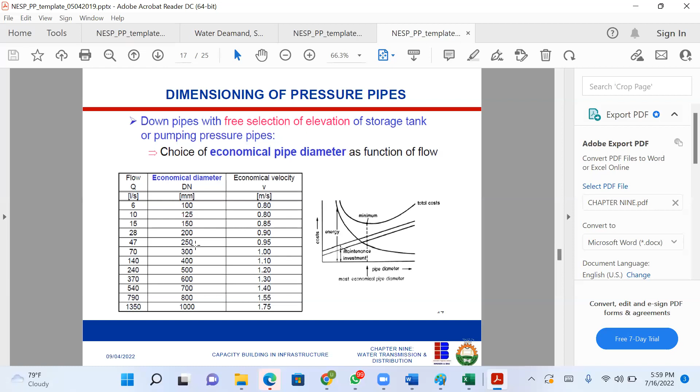Right? Okay. Dimension pipes. I think we discussed all this yesterday. Tomorrow we're doing the calculation. So all these ones are in chapter 8 also, and so on and so forth. Right. So the only chapter we didn't do now is chapter 8, which will be the foundation of our next class. But I want to encourage us, if you get back within the week, try and study this chapter 8, right?